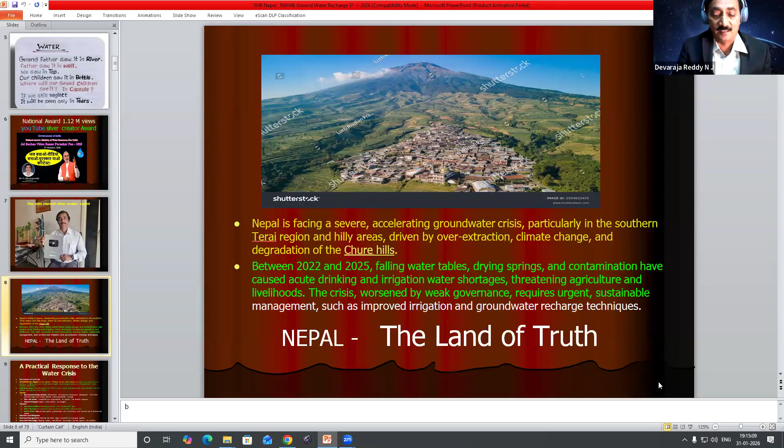The crisis is not only everywhere in the cities or rural sector; drying up of springs is the major cause. We have to strengthen the springs. In the Western Ghats also, similarly, lakhs of springs are there, but the springs dried up. Our rivers' movement has also stopped. Like that, let's talk about Karnataka geology.

I want to brief about Karnataka geology. In the Western Ghats belt, some areas receive 7,000 millimeter rainfall, while some pockets receive only 350 millimeter rainfall. We can see the scarcity of water in coastal Karnataka, scarcity in the Western Ghats also, and also in the dry land like Chitradurga we can see scarcity. That's why we have to conserve every drop of water. That is the main thing.

I will come to the case studies. You see the shallow aquifers, these type of pumps are there in Nepal. In Karnataka also, in some places we have introduced these type of mini hand pumps, open wells, so dry. That's why you can see the beauty of Nepal—the rainfall is almost 1,500 to 1,600 millimeters, and 80% of the precipitation occurs during the summer monsoon.

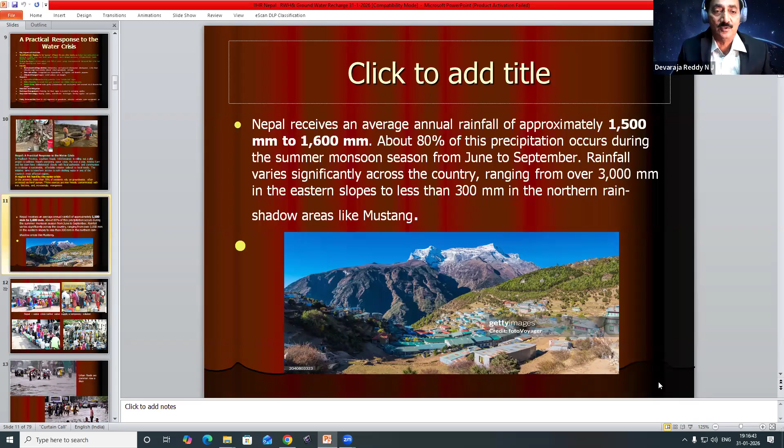Some places get 3,000 millimeter rainfall, while some pockets receive only 300 millimeter. So what next? You can see tankers everywhere, common throughout the world. In Cherrapunji, we receive more than 10,000 millimeter rainfall, yet after the monsoon is over and summer starts, we can see tankers there too. In Rajasthan, with just 200 millimeter rainfall, we also see tanker water supply.

Because we are not well planned. Nowadays, one big task is climate change, which is the big challenge.

Just look at Kodagu, Coorg, part of Karnataka and Kerala - in the last 4-5 years we can see how landslides are coming, even in the core forest areas. Because of climate change, we see urban floods. In Bengaluru, just 50 millimeter of rainfall causes floods, because of cloud bursts.

Coming to the quality of water - can we drink this type of tapped water from public taps? No, we don't trust these taps because we trust bottled water supply instead. Every person from Rashtrapati Bhavan to an Ashraya House, we see RO water is the big business in India. I want to directly come to the case studies.

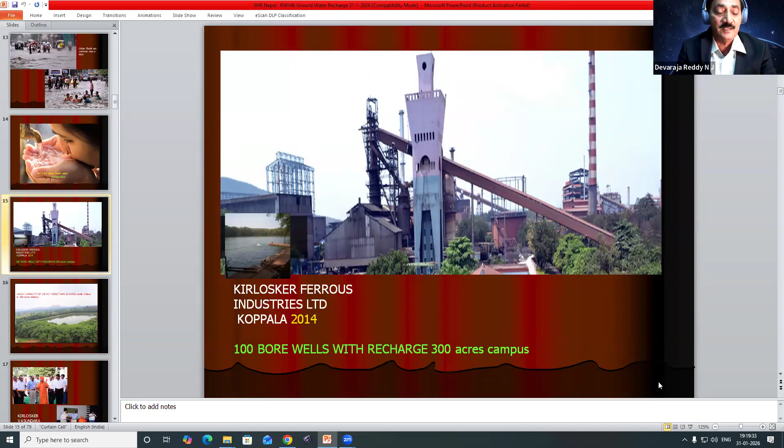The managing director of Kirloskar invited me as per my consultant advice. They made 4 lakes - you can see the beauty of Kirloskar now. This is a less rainfall area, semi-arid terrain, hard rock terrain with very poor rainfall, but in Kirloskar now you can see it's like a resort. 4 lakes were filled - Lake A, Lake B, Lake C, Lake D. Almost 100 borewells were rejuvenated.

You can see our Swamiji coming for the inauguration. Kirloskar honored me with the Kirloskar Vasundhara Mitra Award in 2015. The entire Kirloskar now has water - no water crisis in the industry. Till today, almost 10 years, they are not buying even 1 liter of water from outside source. Self-sufficient, no crisis in Kirloskar.

Another case study in Bengaluru is Satya Sai Ashram, Baba Ka Mandir, almost 16-acre campus with more than 10 borewells, 1,650 feet deep, but no water. What next? They were buying tanker water from outside source, spending 2 lakh rupees per month for tanker supply. Ultimately, as per advice, one big farm pond plus 3 borewells were rejuvenated. Now this Satya Sai Mandir is self-sufficient in water.

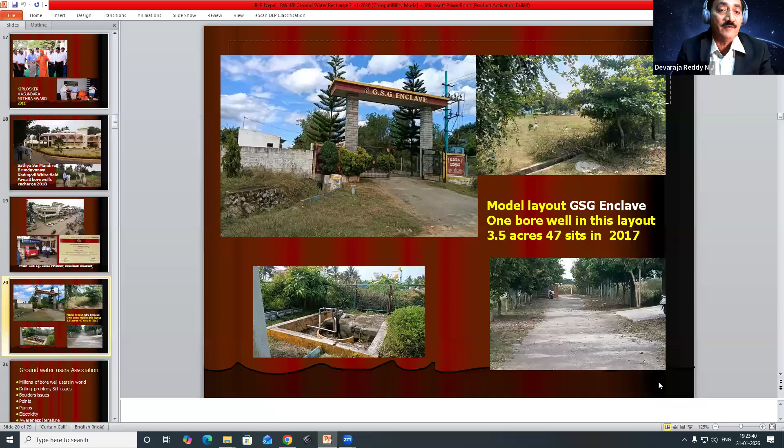No corporation water, no tanker water, no individual borewells are there. So why can't we go for this kind of community water harvesting everywhere? If every community adopts this concept, automatically we can avoid excessive borewells.

Coming to borewells - because of the Nepal water crisis, Cherrapunji water crisis, coastal Kerala water crisis - why does this happen? Because borewells are not assured for 100 years or 2000 years. A borewell's life may be 1 year, 1 month, or 10 years - we don't know. At the time of drilling we may get plenty of water, but within 2-3 years the borewell can dry up.

Millions of borewells are drilled across the world - 1,000 feet, 2,000 feet, 100 feet - and so many face drilling problems. At the time of drilling we face silt issues, boulder issues, casing pipe issues. Borewells are not ready to drill sometimes - these are some challenges we face.

Some issues arise because experienced hydrogeologists are not available in many places. Sometimes we get water in the borewell, but the pumps don't match. Sometimes electricity is the issue. Finally, awareness is not there, literature is not there - our websites, no educative websites are there, and data management is not there.

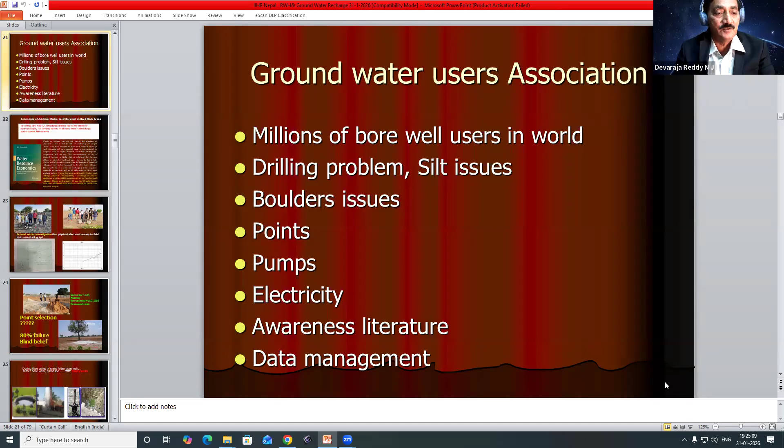That's why every country is spending crores and crores of rupees on borewells, motors, pumps, pipelines, and electricity. So we are using a huge amount of resources for this groundwater issue.

In this connection, Professor Chandrakant is a professor at Gandhi Krishi Vignana Kendra, Bangalore. He wrote a book, Water Resource Economics. Almost 800 pages, with 100 pages covering Devaraja Reddy's work in semi-arid terrain - a detailed story with interviews of every farmer.

What is the impact after borewell recharge? What is your borewell yield? What is the cropping pattern? How to minimize water use? What is water auditing? Everything is covered in this book. If anyone is interested, you can buy this book, Water Resource Economics, by Mr. M.G. Chandrakant.

So I am basically a geophysicist. I started my career as a geophysicist with the help of an electronic device, because in India there are n number of water-finding devices - the coconut method, copper rod method, watch method, ring method, and so on. N number of so-called geologists use these, but like Devaraj Reddy, I use a geophysical electronic survey device. These instruments are manufactured in India, in Hyderabad.

IGIS, Integrated Geophysical Survey Instruments - I purchased almost 3 to 4 of these instruments during my career. Using this technology, borewells up to 1,500, 2,000 feet have been drilled. Every geologist can easily interpret this. This is the graph - you can see readings at 10 meters, 20 meters, 30, 40 meters, and so on, up to 1,500 feet that we can survey.

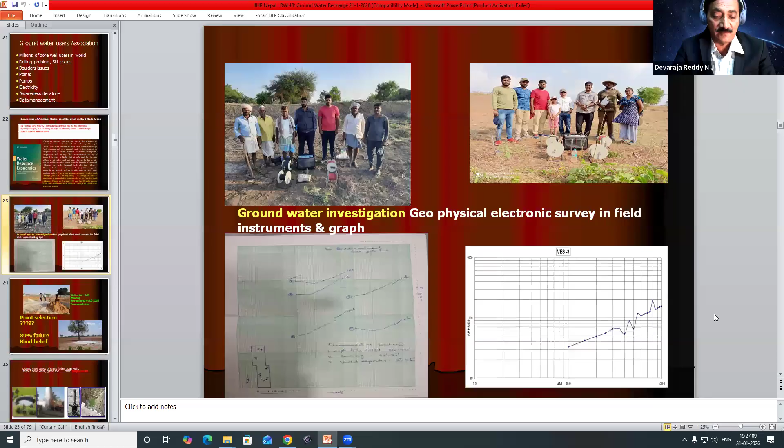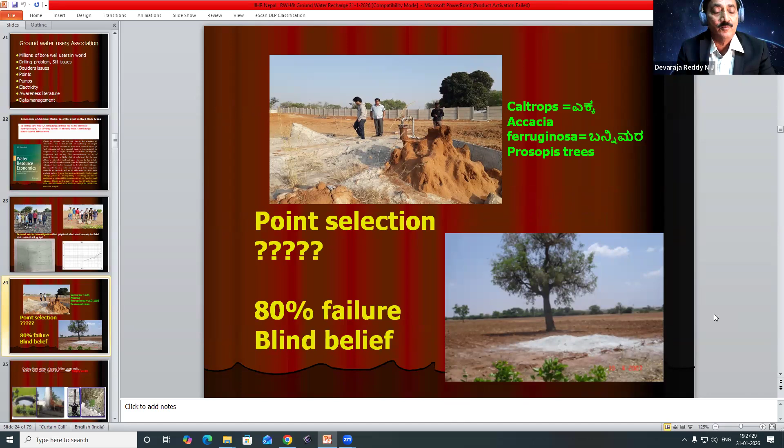In this graph you can see these anomalies. Based on this, almost 1 lakh plus borewells have been selected using this geophysical electronic survey alone. Some places still use traditional methods like the coconut method or acacia method and so on. Based on data, 80% of borewells fail because of these traditional practices.

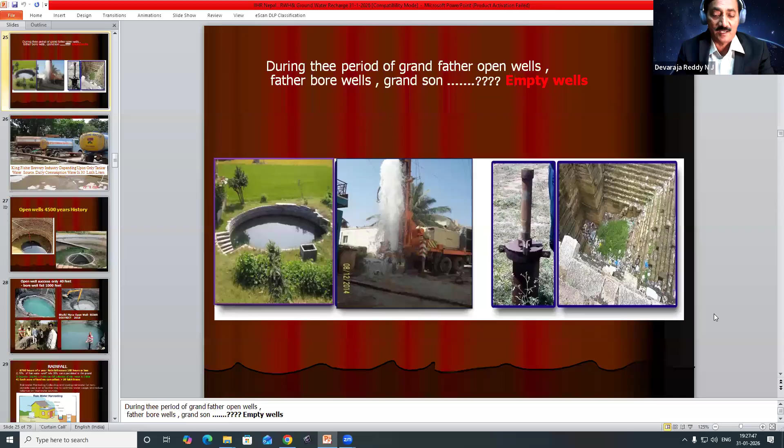That's why I say, during our grandfather's time, there was plenty of water in open wells. Afterwards borewells came, and they also had plenty of water. But within 30-40 years, borewells dried up, and our open wells also dried up. What next? So now everywhere we see tankers.

I think everybody knows, not only in India - Kingfisher beer brewery, United Breweries' Kingfisher brand, their daily requirement is 300 tankers. 300 tankers - you can imagine that.

So they are buying the tanker source water, but this water is not drinkable. This tanker source also has 700-800 ppm. This water goes to the RO unit. After the RO unit, it's a 70-30 ratio: 70% is waste, 30% is used for the brewery purpose as RO water. This water goes to the brewery, and finally the brewery bottles come to the market.

So how much are we spending for this brewery unit? After my visit, almost 6 to 8 months later, with the help of rooftop rainwater harvesting, they are using that water directly for the brewery - no RO is required.

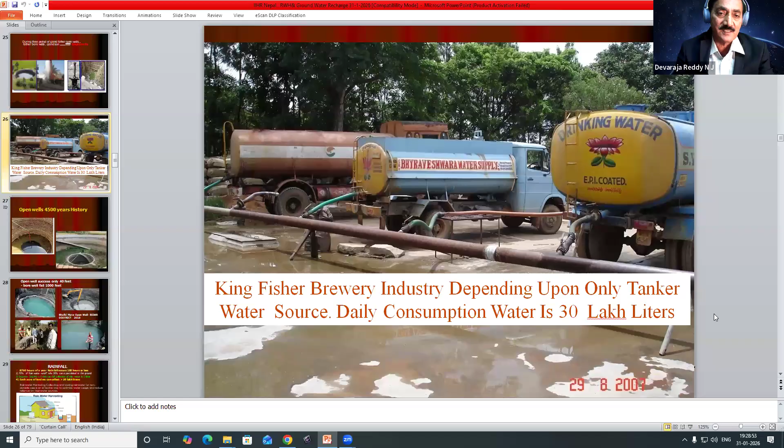Rainwater is such pure water everywhere - not only Nepal, India, or some European countries, but every place. Why can't we go for rooftop rain harvesting?

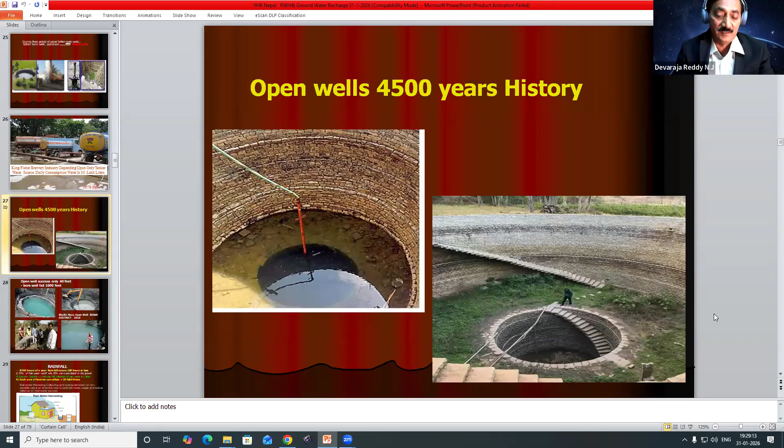This is one model: open wells. Nepal also has n number of these type of wells. Once the water table is depleted, we fill them with waste and silty material, even though these wells have a 4,500 year history - we are closing them. That's why nowadays I am popularizing these open wells. These open wells have a very good history.

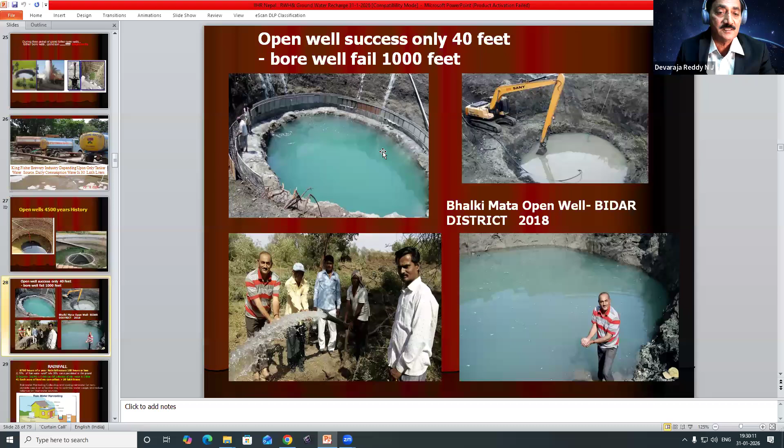100 feet wells can be drilled within 4 to 5 days, because in a shallow aquifer these open wells are very ideal compared to the bore well. We can see fresh water, crystal clear water - no nitrates, no arsenic, nothing, no issues at all. Almost 50 to 60% of the open wells provide for all the activities. This is one case study in North Karnataka.

That's why we come to rainwater harvesting. Per year, almost 8,760 hours a year, rainfall occurs only 100 hours in some places. These 100 hours are very precious. We have to conserve every drop of water.

In this rainwater, 70% is runoff, 30% can be percolated. In Nepal, some places get 300 mm, some places get 3000 millimeter rainfall. How to collect it? I can give you the mathematics: for 1 square meter area, 1 millimeter of rainfall falling gives us 1 liter of rainwater collected. In some pockets of Nepal, there is 500 mm rainfall. In 500 mm rainfall, for 1 acre area, we can collect 20 lakh liters of rainwater.

You can even imagine how much rainwater can be stored for the summer, because summer may be 4 or 5 months. That stored rainwater can be used during summer. This is a very easy concept.

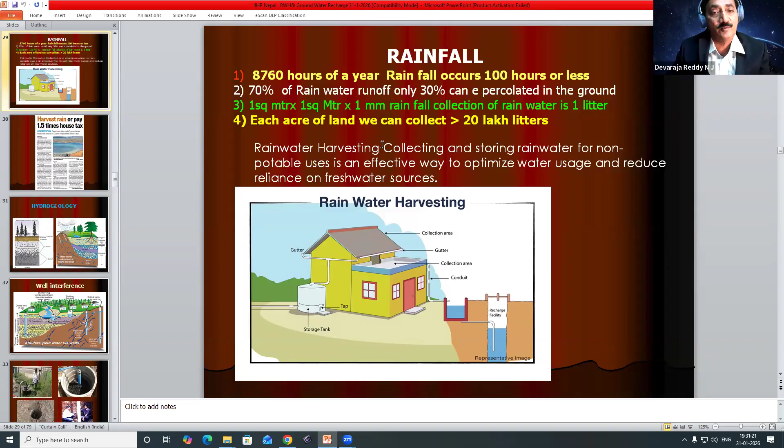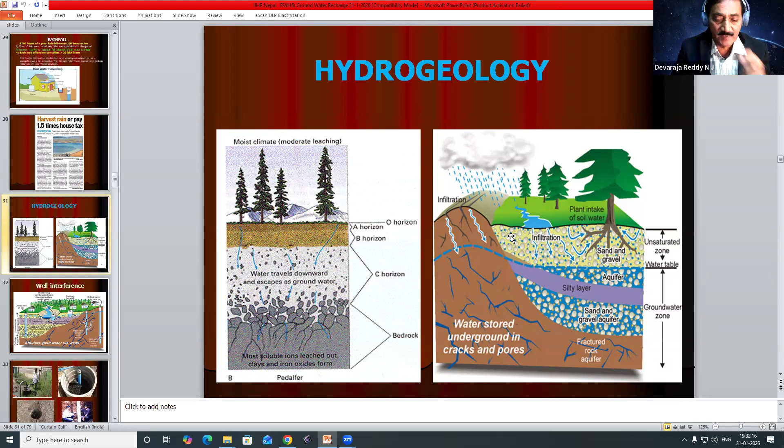We are getting water there, but this water is not potable - not good for drinking, not good for agriculture, not good for industrial purpose either. This differs based on location in some places. This is the cross section of the mother earth.

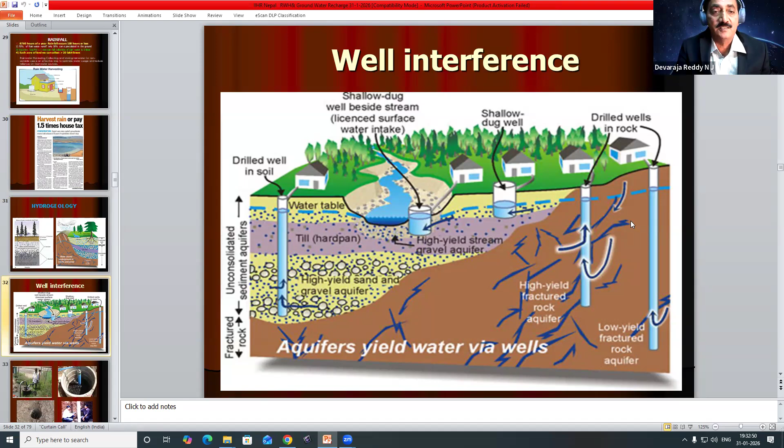Coming to the borewell - how to rejuvenate a borewell? Because n number of borewells have been drilled. If at the time of drilling there was water, but after maybe 4 or 5 years it becomes a dummy borewell, we tend to neglect it. Please don't neglect your dry borewells - these dry borewells can be rejuvenated.

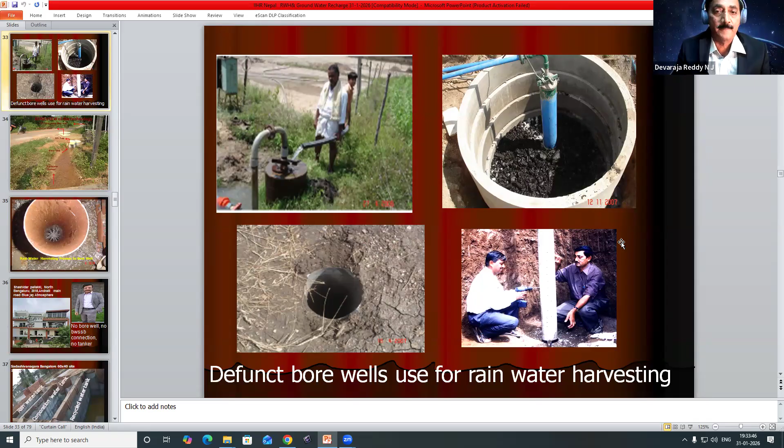Depending upon the area, we have designed more than 20 types of recharge models. You can see the surface runoff can be easily diverted through one stage of filtration, then to the next level, our borewell recharge unit.

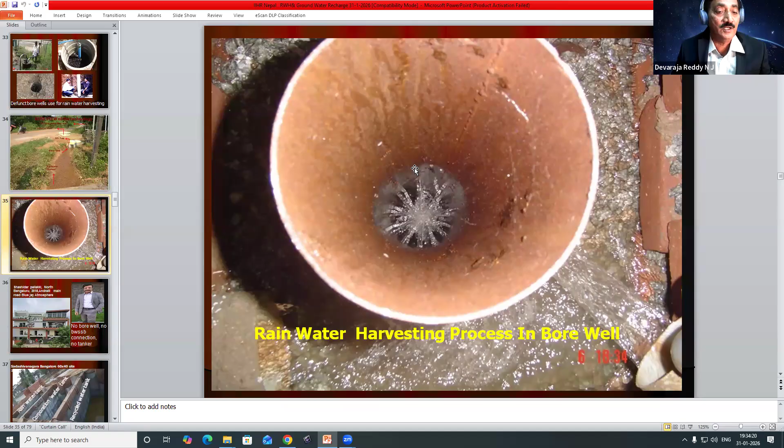This is the cross section of the borewell. Inside, you can see crystal clear water going to the aquifer. In the industrial sector, or in polluted gutters and drains, we should not contaminate or mix rainwater with these gutters. Only for borewell recharge should you select surface runoff, and you must check if the water is good or not before putting it into our borewell recharge units.

This is the cross section of the borewell. One case study in Bengaluru.

In Bengaluru, it's a villa community called Blue Jays Sunshine. The site cost is 2.5 crores, a 60 by 40 plot, built house. The owner's name is Sheshidhar Palaki. On a 60 by 40 plot, no borewell, no metro Kaveri water, no tanker water. The building cost is 4 crore rupees. 4 crore rupees, can you imagine? 4 crore rupees invested, no borewell drilled, no metro connection, no tanker source. The entire building, and below we can see the storage tank.

Three tanks were built: tank A, tank B, tank C. That's why we divided these tanks - one is a rainwater tank, one is a corporation water tank, another is a recycled water tank. But actually, his house has six occupants, so all three tanks are filled with rainwater, no other source, for 6 people throughout the year. Storage capacity is a 1.5 lakh liter tank.

This is an 8 year case study. Till today, in Shashidhar Palaki's house, rainwater is used for drinking, bathing, flushing, vehicle wash, and gardening. Everything is covered by rainwater only. No RO system is there in the Shashidhar Palaki house. Like that, we have made so many successful examples - without a borewell also we can go for house construction.

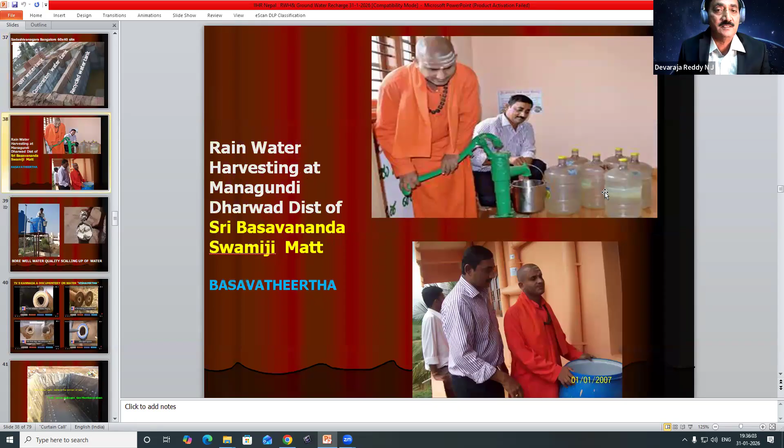So many spiritual centers, these are sadhus. The Guruji's name is Basavananda Swamiji. The water quality there was not good, borewell TDS was more, that's why we built a rainwater tank. The rainwater tank capacity is 65,000 liters, and the tank is filled with rainwater.

Guruji has a small hand pump, he is drawing the water. No electricity is connected to this tank. He is using this water for all activities, including drinking and cooking. This tank is named Basava Tirth - in the temple, we are using it like Tirtha water. At Swamiji's Mandir, this tank is named Basava Tirth like that.

So many people are using rainwater tanks named as Shiva Tirth, Ganga, Ramatirth, like that - so many names we can give.

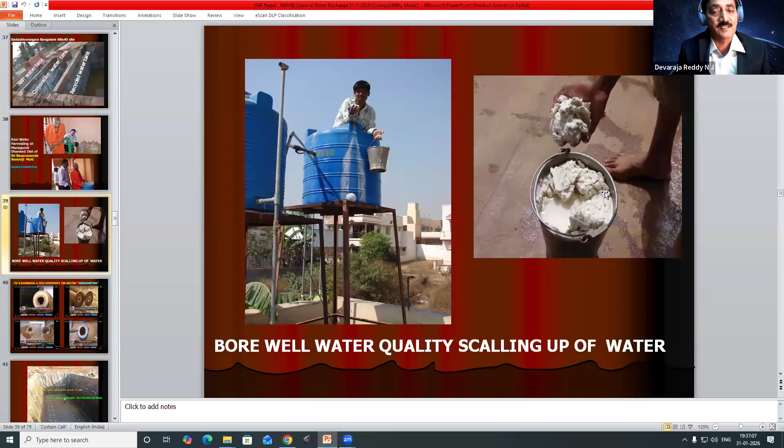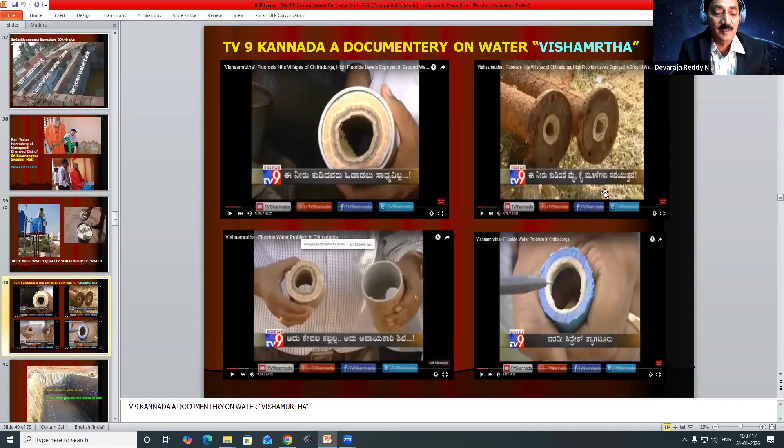Regarding quality, if you go deeper and deeper into the borewell, we find these types of scaling issues. That's why so many people suffer hair fall mainly because good quality water is not there - hair fall, skin issues, or scaling issues, so many problems we have to face. You can see the pipes are so scaled because the water is not good, iron may choke the pipe. Quality is very important.

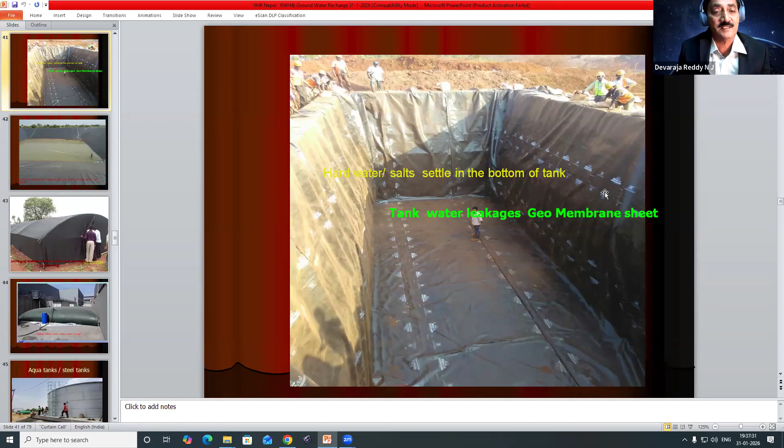For rainwater, you can go for these types of tanks - very simple. The tank is covered by a geomembrane, no leakages, no plastering, nothing required. Huge tanks, you can see this is one model.

For agriculture or industry, for summer, why not community tanks? In every village, based upon the village or community, we make 1 crore, 2 crore, 3 crore liter tanks. In Nepal, because of 1500-1600 millimeter rainfall, there's no need of any other source to fill - rainwater alone can fill it, with maybe 10% evaporation loss.

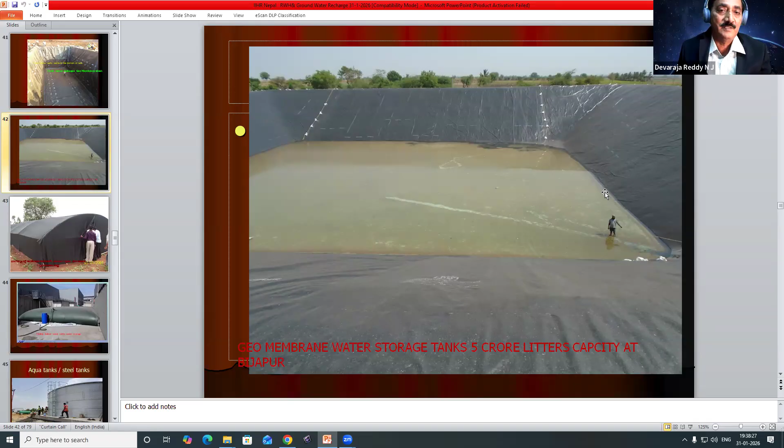Like this, we use these geomembrane tanks - simple earthwork excavation, fine finishing, covered by geomembrane. This material is high density polyethylene, with a minimum 10 years life, so don't worry about these things. Finally, we have to cover it with fencing, which is very important because misuse may happen, that's why we cover the membrane with fencing.

Some farmers are very clever because of the 10% evaporation loss, they cover the tanks with shade nets and such. So many people are using their innovative ideas.

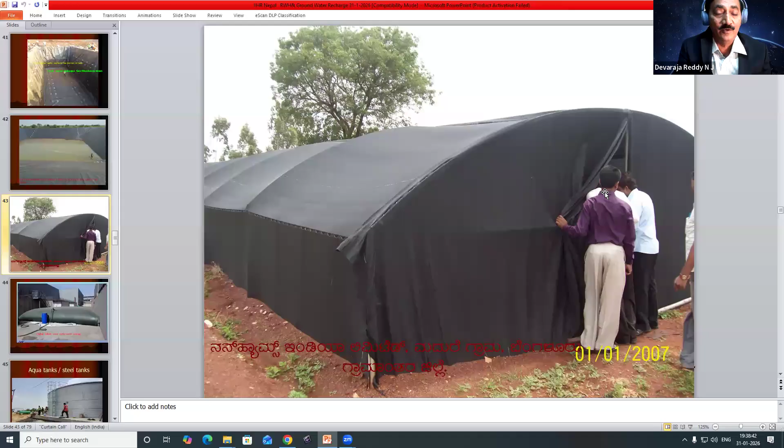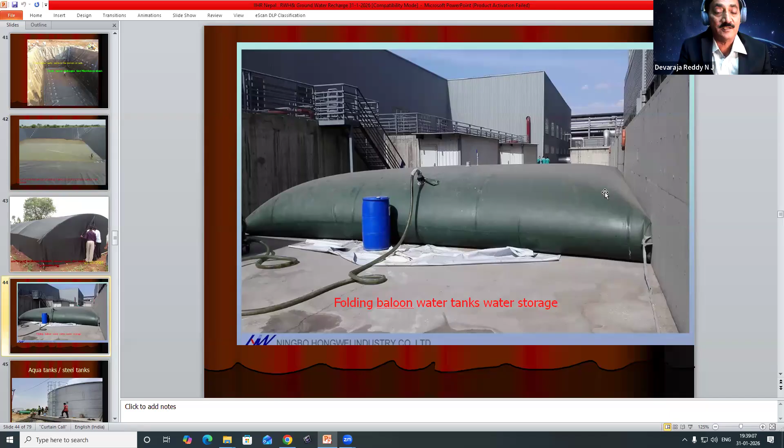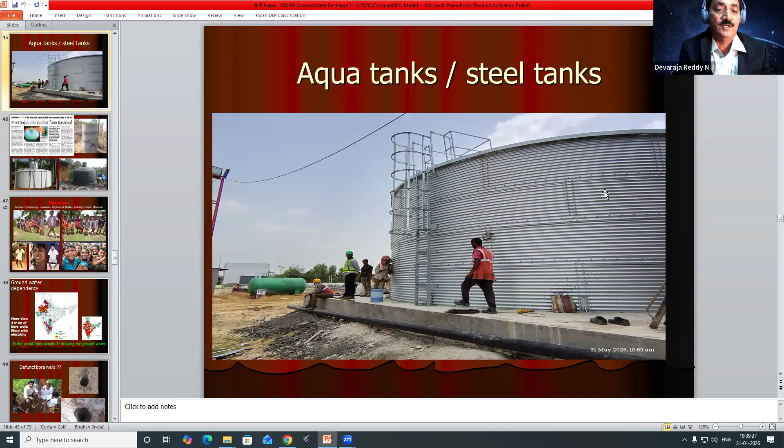There is no evaporation loss, and this water can be used for all activities. If you want to spend some money, go for these tanks. It is very popular in Bangalore, especially in big apartments where they go for these aqua tanks. They are a little costly, about minimum 8 to 10 rupees per liter.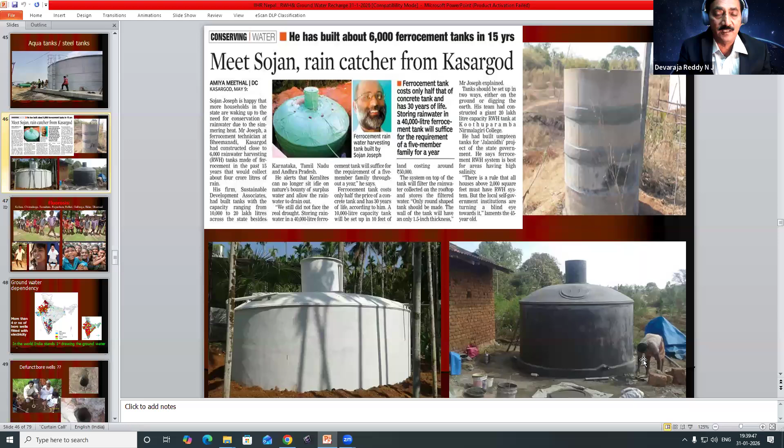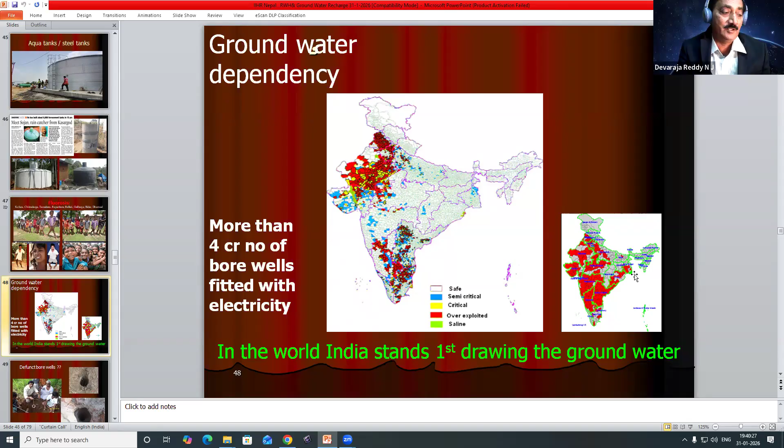Just in 50 years, more than 4 crore borewells have been drilled across India. In the world, India stands first in drawing groundwater from Mother Earth. What next? Almost 80% of the aquifers are dried up, maybe only 20% remains. What about the dead, dry borewells?

At the time of drilling, if we are not getting water, we simply close the borewell. But in Tamil Nadu state there is one policy: at the time of drilling, whether you get water or no water, don't close your borewell. We have to provide casing.

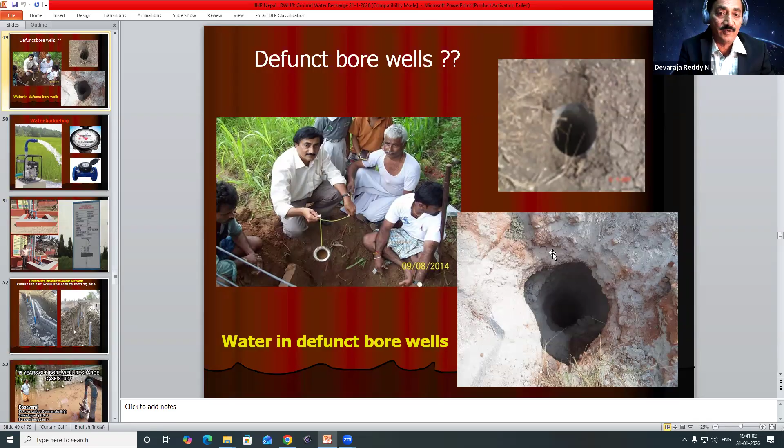Like this, one farmer at the time of drilling got no water, but after a matter of 4-5 months you can see water. So please don't abandon your borewell. Please get the borewell rejuvenated, and you can use this borewell again.

Finally, water budgeting is very important. Some say 2 inches, somebody says 3 inches, but I say how many gallons of water is coming from your borewell. That's why water auditing is very important, to know what water is required for agriculture or household level. For any commercial usage, put a meter, otherwise we waste our precious groundwater. Every drop has to be counted.

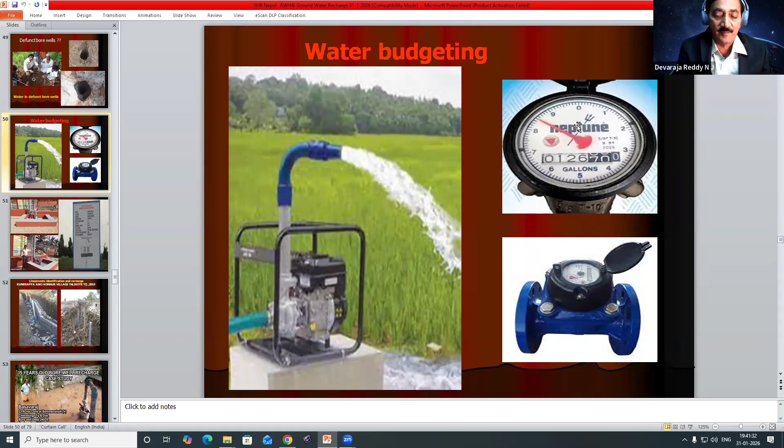At the borewell site, you can put up an information board showing how many borewells are drilled, the borewell name, depth, casing pipe details, how many gaps, how much yield you are getting, and pump details along with the cross section of the borewell. You see this school has a borewell recharge unit with a rainwater pipe from the rooftop going to the recharge unit, with entire data available nearby.

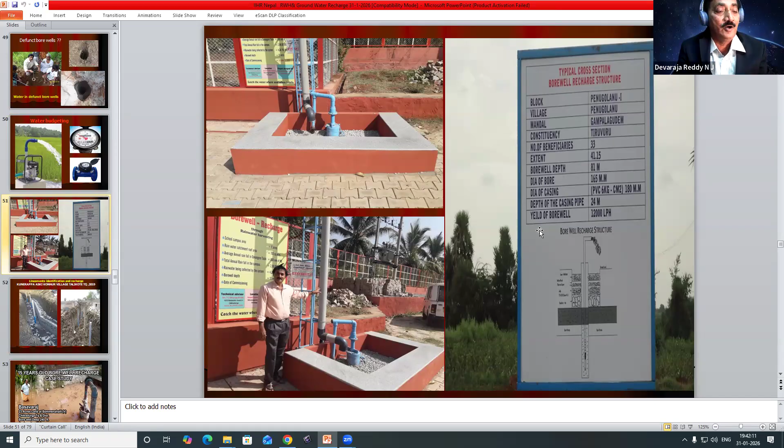Like that, for every water body you have to make all the details: what is your open well capacity, what is the depth, what is the width, what is the water quality, how much water is required. Everything has to be documented for your water bodies.

In Nepal, I observed so many lineaments, and these elements are very important. You see one case study in Karnataka, where 20 borewells are drilled across the lineament, numbered one, two, and so on. All the borewells struck water at the same depth and all were regenerated.

This is the lineament movement, a north-south lineament. The entire farmland's rainwater comes to this recharge unit and then goes to the lineament. Because of this lineament, the entire village's groundwater table improved.

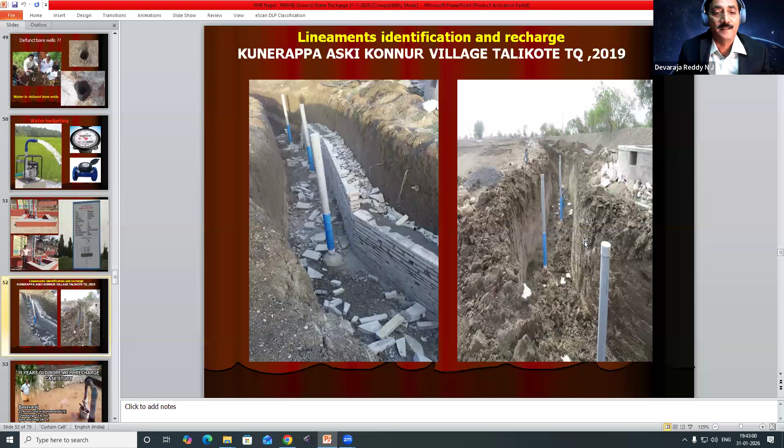Like that, in a cost effective way you can go for aquifer recharge also. You see a farmer, Basavaraj, and his recharge structure. This is the borewell recharge unit, and all the details are given.

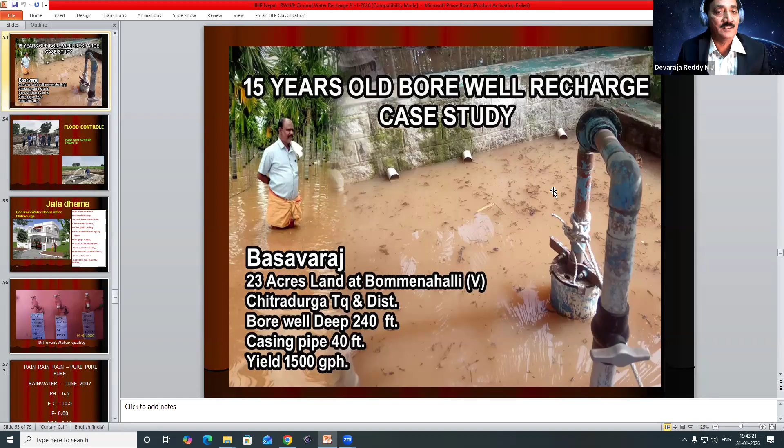For 23 acres of land, the borewell depth is 240 feet, casing pipe is 40 feet. Yield was 1500 gallons per hour, and after recharge this went up to 3000 gallons per hour. There are such case studies showing how much yield is improved.

Inside my house, there is one rainwater tank with a capacity of 40,000 liters. Outside in the parking area, there is one more tank for municipal water, with a storage capacity of 12,000 liters. In my house, there are three water resources: rainwater, borewell water, and river water. My house has rain harvesting, borewell recharge, groundwater recharge, and solar. Totally, my house is eco-friendly.

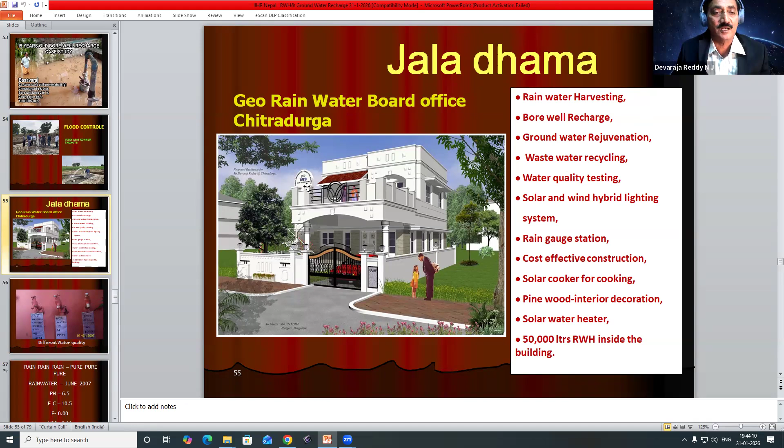In my house, rainwater is for drinking and cooking. The municipal water, Bhadra water, is for bathing. Our borewell water is for flushing. At every household level, you can put this type of water survey to see which water is ideal for what. You can see the rainwater, how beautiful it is. The pH is 6.5, EC is 10.5, fluoride 0, nitrate 0. So no RO is required. This is such beautiful water.

Simple - easily a layman can do rain harvesting. This is the rooftop pipeline, it will come, it will come. You collect the rainwater with the help of buckets and put it in the tank. This is the LKG step. Finally, this pipe can directly go to the sump tank, water tank. At every household level, you can collect rainwater, because just for 30 or 40 days of rainfall of 500 mm, you can usually collect more than 60,000 liters of rainwater free of cost. No energy is required. Very simple concept, a layman's concept.

You can see, at the time of rainy days, you put a white cloth on top. This is the water container. No filters are required - such crystal clear water you can collect in this tank. This is some typical model.

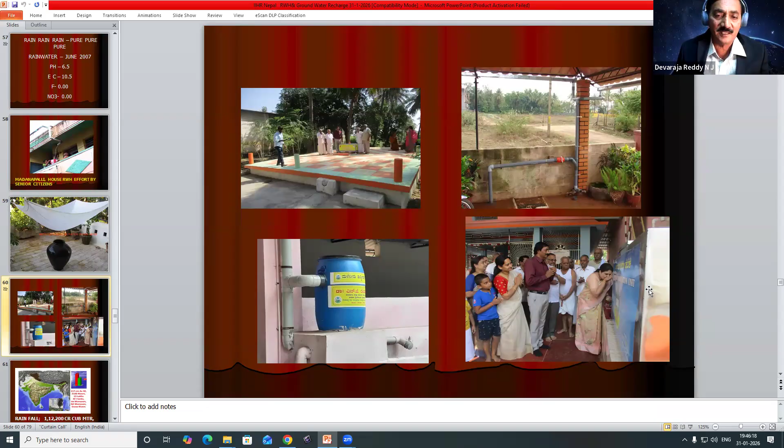So many places this rainwater can be used for all activities. About rainfall in India - India receives very good rainfall, 1,170 millimeters. India stands second in the world, with 1,150 to 1,450 millimeters of rainfall; South America stands first. If you collect the entire rainfall of India, 1,12,200 crore cubic meters of rainwater can be collected, while our demand is only 71,000 crore cubic meters.

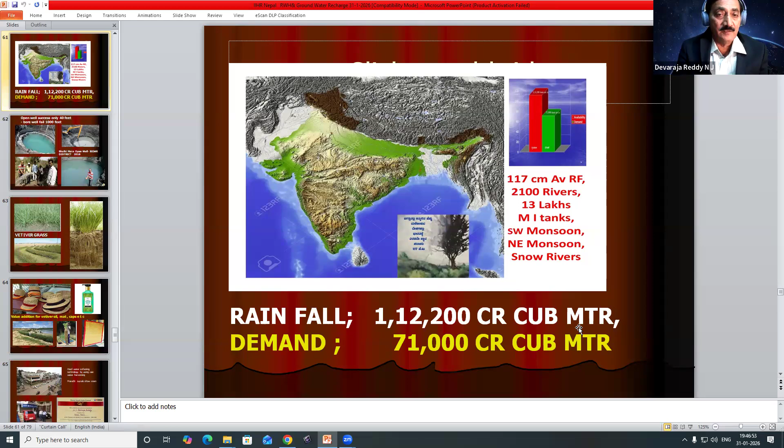You can easily, without groundwater contamination, draw the rainwater.

For soil erosion, this is the vetiver grass. Vetiver grass is very ideal for hilly terrain. You see, the roots grow more than 1 meter. It reduces soil erosion and conserves rainwater wherever and whenever it falls on the ground. So the very ideal way to conserve soil and water is vetiver grass. From vetiver grass, caps, painkillers, mats - everything can be created.

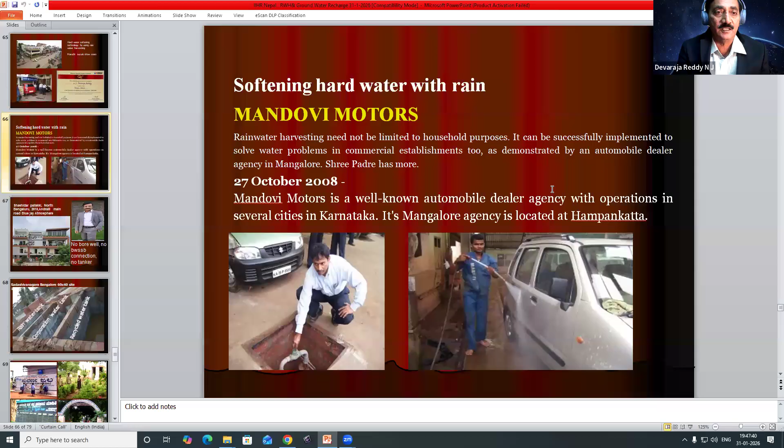This is the Mandovi Motors case study. So many schools have adopted this. In government schools, for midday meals, we are providing rainwater for drinking and other uses. In the school, we are making a 3-student council: one is the rainwater minister, one is the forest minister, and one is the sanitation minister. There is also a vegetable garden in the government schools - you see the entire school seems to be green, green, green.

Like that, in Karnataka, we made 5 model schools. All 5 model schools received an award from the education department.

This is one case study. In the school, we make the Miyawaki forest. You see, children's participation is very important in schools. In every Miyawaki high-density plantation, plants are placed at 1 meter or 1.5 meter intervals, with n number of species - all forest species or fruit species, exotic fruits and the like. You see the Miyawaki forest in the schools. Automatically, within 2 to 3 years, the entire school campus becomes green.

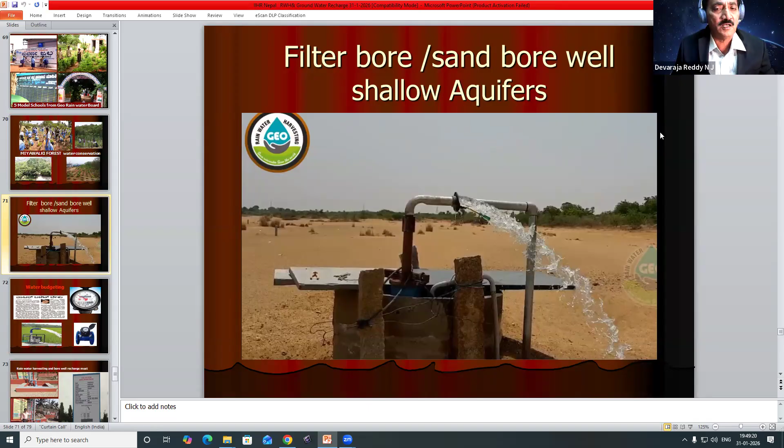In some places, where shallow aquifers are present and there is sand thickness, you can go for sand bores - we can say filter bore or sand bore. This sand bore water is such beautiful, crystal clear water. It is very popular in sandy areas.

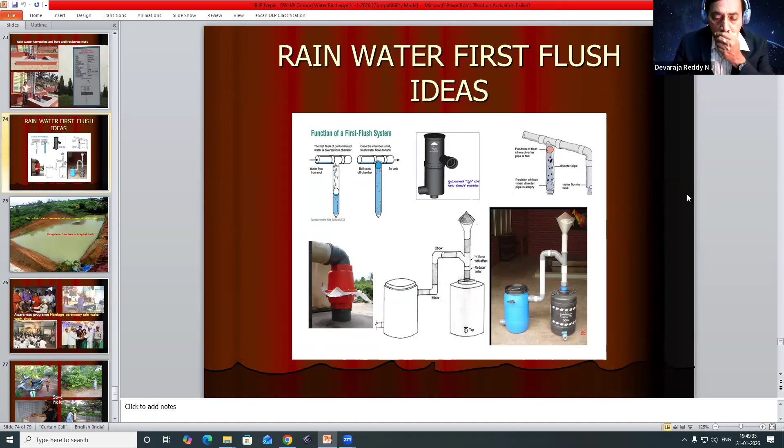These are the filters you can see. This is the so many filter models we have designed. If the place is available to make big tanks, this is one case study in a hospital area.

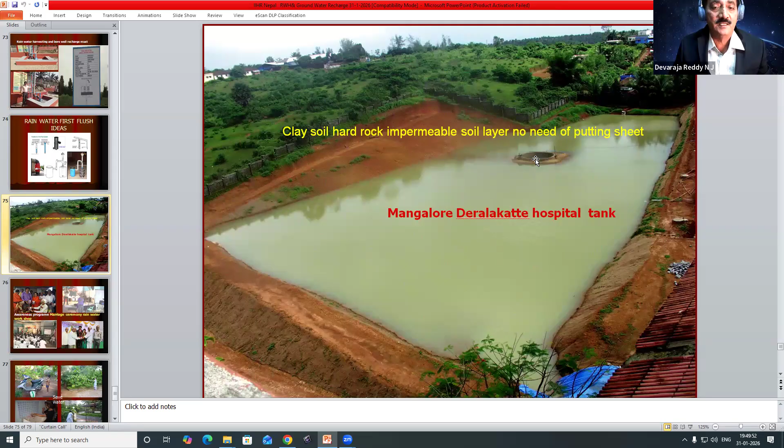This is a big area, more than 10 crore liters of rainwater is collected. In the middle, we make the jack well. This water has to be filtered, and we can pump it for drinking purpose. Like that, we made so many tanks. We are giving the awareness.

Awareness is very important. These are the marriage ceremonies. At the time of marriage ceremony, we make use of our rainwater programs. Just after the marriage, we are promoting our books. This is the marriage ceremony. We are making a slideshow. This is one case study.

This is in Karnataka. These belong to Telugu people, these are Karnataka people, they don't know Kannada, they don't know Telugu. In the same ceremony, one dialogue is in Telugu, one dialogue is in Kannada, like that. So many marriage ceremonies, minimum per year more than 10 plus marriage ceremonies. I give lectures at marriage ceremonies.

Finally, water usage is important. At every household level, every day we are using water for vehicle wash. At the time of brushing, if you are giving good skills, within 1 liter you can wash your mouth and all. If you neglect, maybe huge water will be wasted. In the garden, at every household level, huge amounts of water are wasted.

Which water is the smart water? This is the easy way, a small house. This collected water is rainwater. This water is used for drinking and cooking purposes.